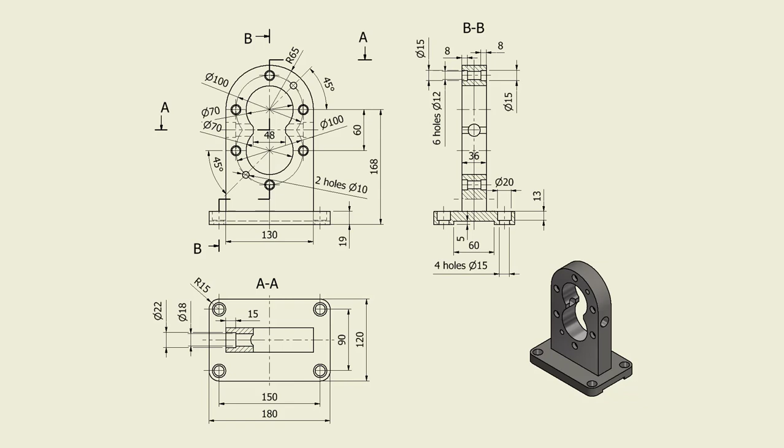Hi my friends, let's model the part number 24 bearing box from my collection of 100 parts.

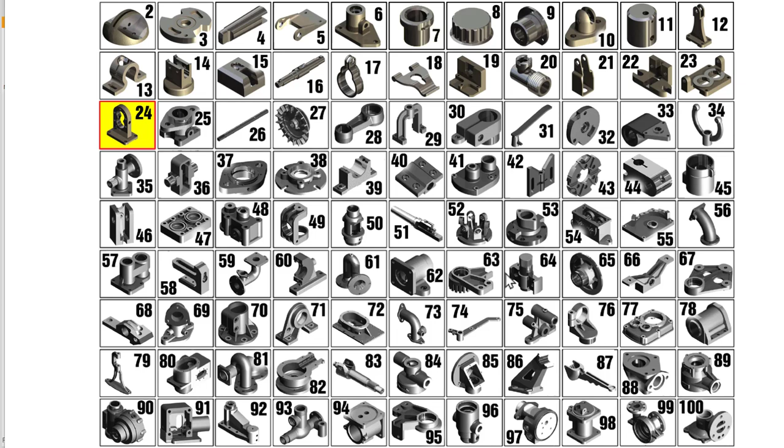Taking a look at the drawing, we see that we have here a part with a bottom plate and one vertical wall where probably some roller bearings in cassettes are installed, everyone, to have room here inside.

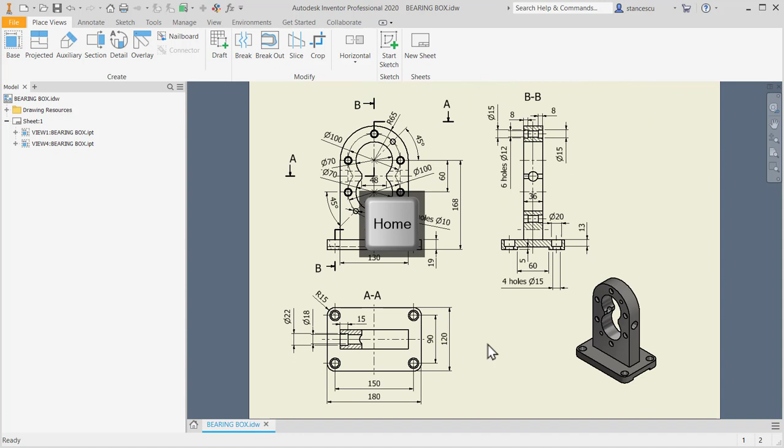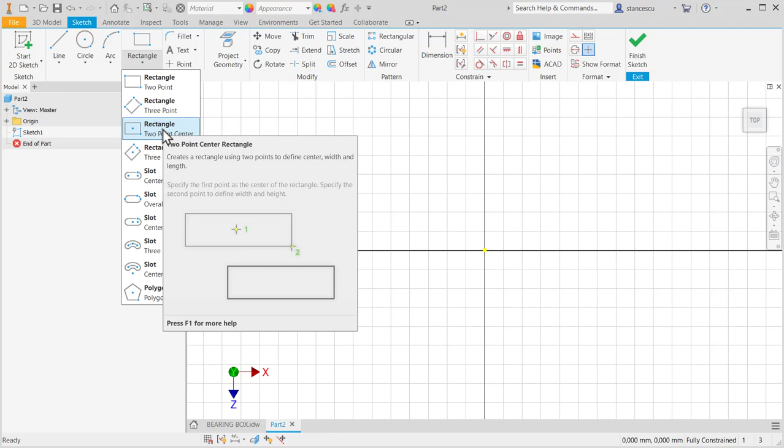We start by creating the bottom plate of 180 on 120 as usual, no problem. I can draw all this without speaking, but I like to tell you about this. I choose the centered rectangle, 180 tab on 120. Finish sketch, F6.

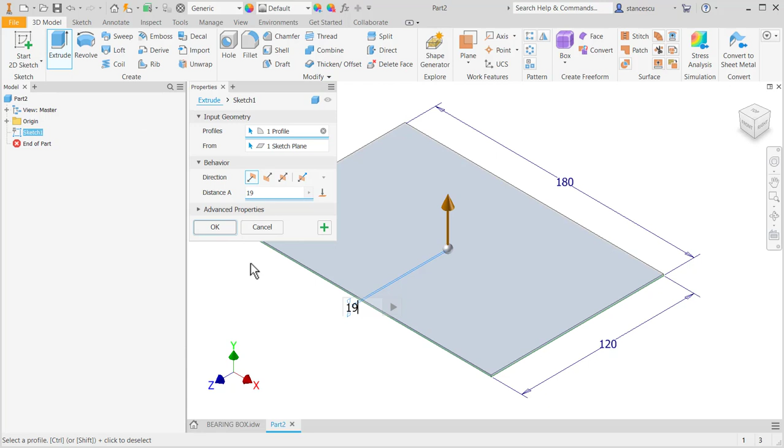The thickness is 19 and there are some fillets of radius 15. Extrude 19, select one edge, fillet of 15 on all the four corners.

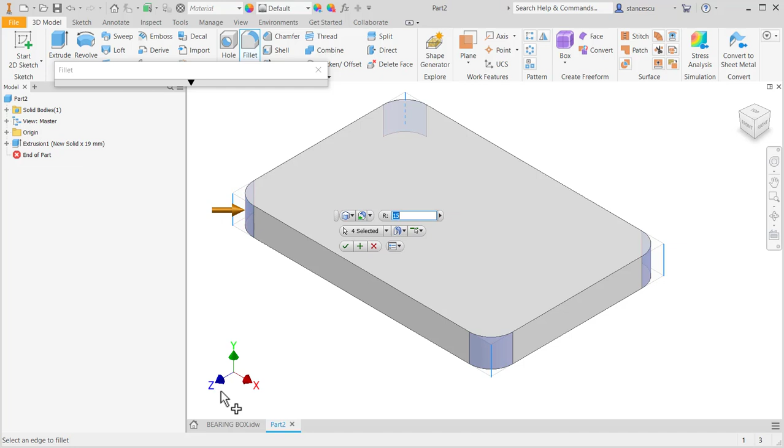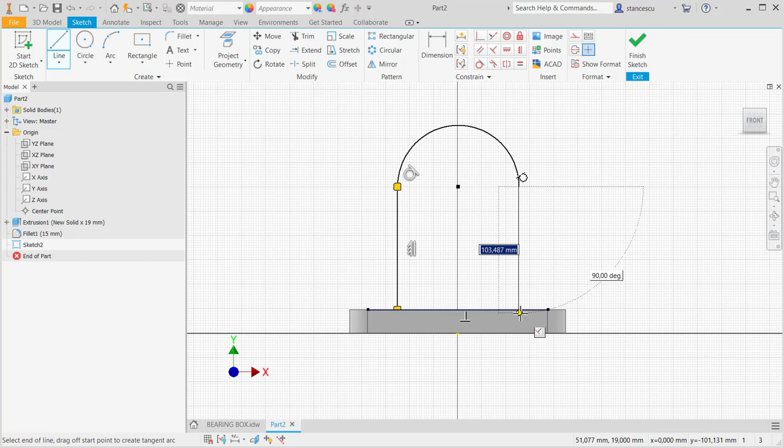Okay, now we use the plane XY to create a contour in our style. We have a style to create contour. Dimensions are 168 from bottom and radius 65 at the top.

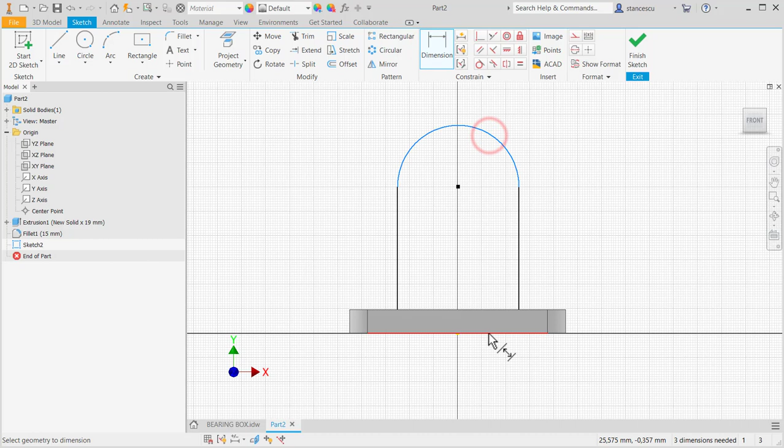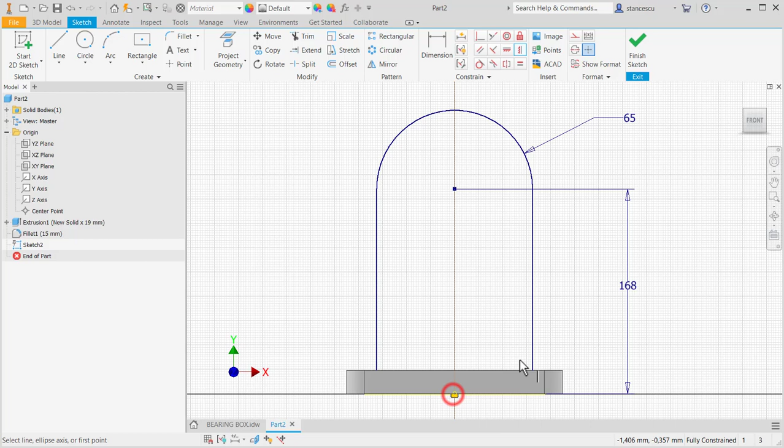Dimension from the bottom 168, and the radius of 65. And this is the final with fully constrained.

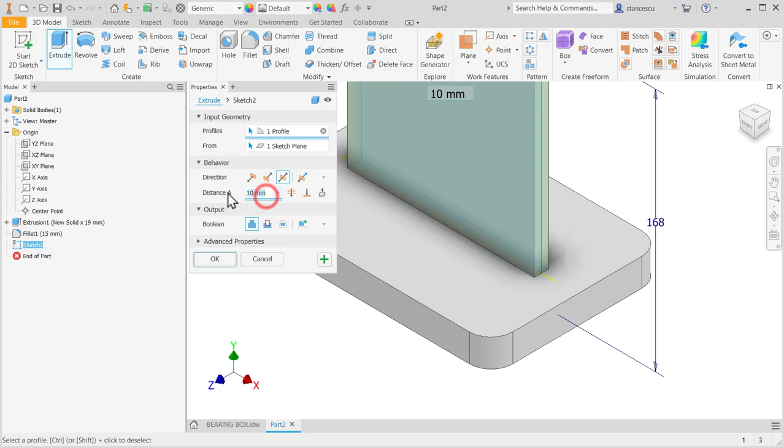Okay, now we have here 36 symmetrical extrusion, symmetrical 36. Double enter. Good. Now there are two circles and two lines of 48. The two circles, one is the center of this and the other is lower, in a lower position. The diameter are 70, the distance is 60 and the gap here is 48.

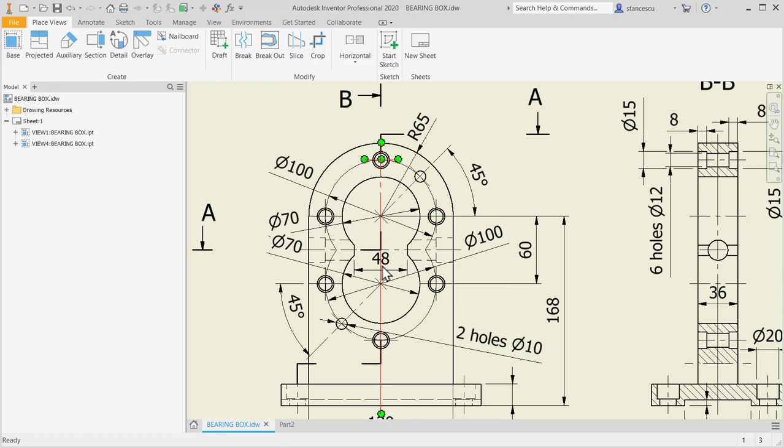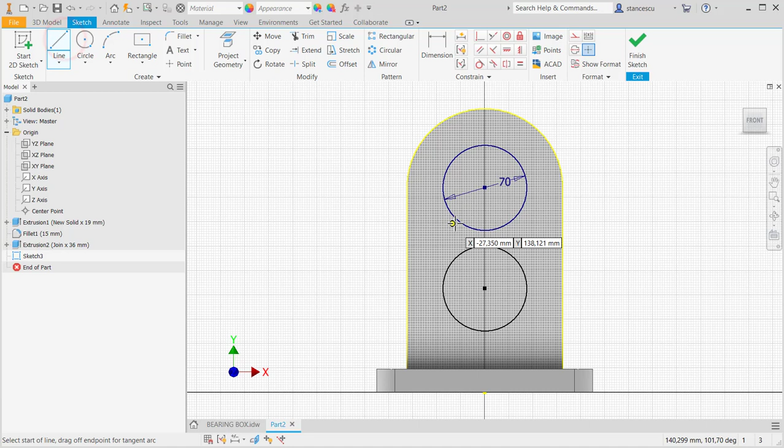On this face we draw a circle with diameter of 70, and another one with the same diameter, on the same vertical with their centers. We don't place the dimension to be so, because we want to draw these lines 1, 2. To be symmetrical, I make them equal, not axis, not other solutions.

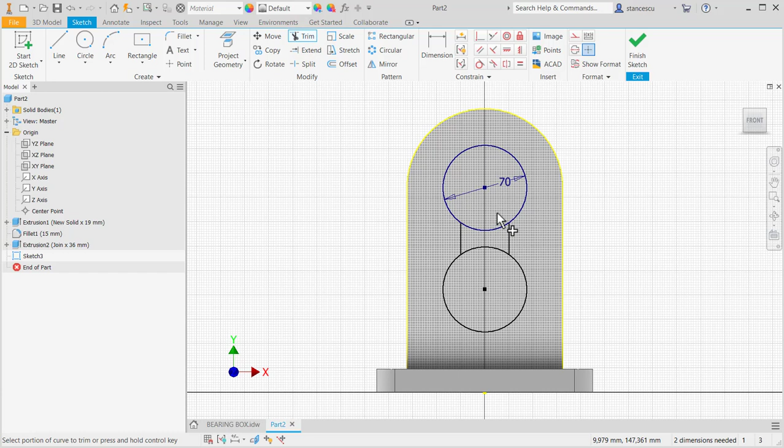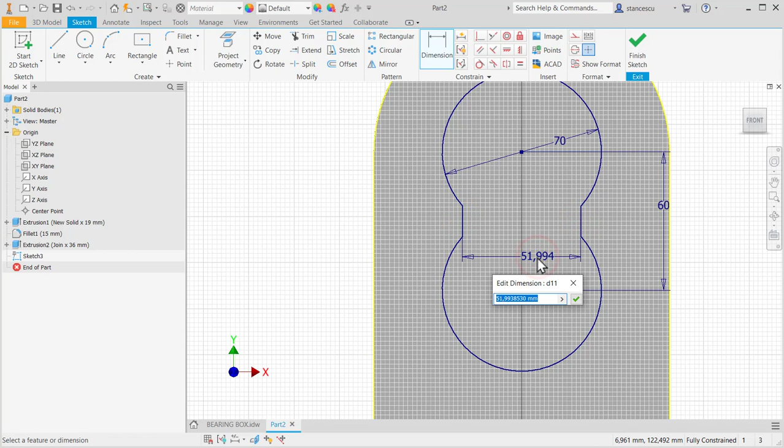And now trim, I press left button and go down. And now I place the distance between the circles of 60. Okay, and then the gap here of 48. Finish sketch, extrude, cut all the way through the part of this area. Good.

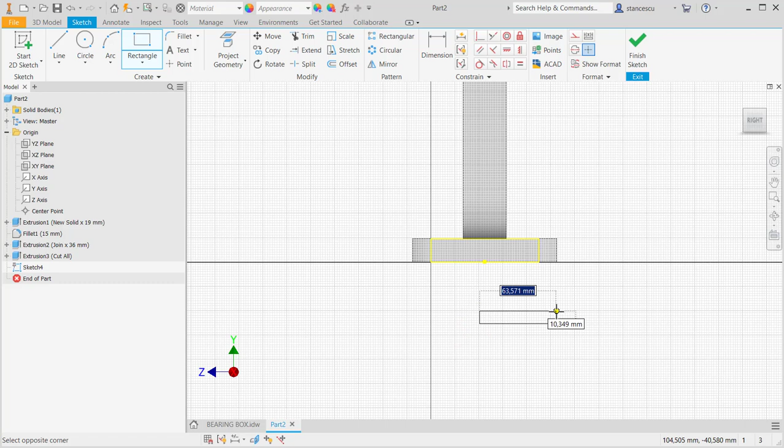We also have an important element, this channel of 60 to 5 on this face, a rectangle of 60 tab 5 with this point coincident with this point. Okay, finish sketch, extrude, cut all the way through the part.

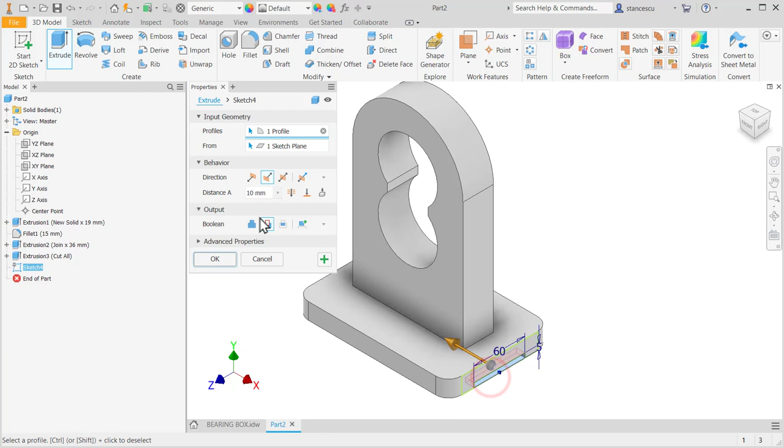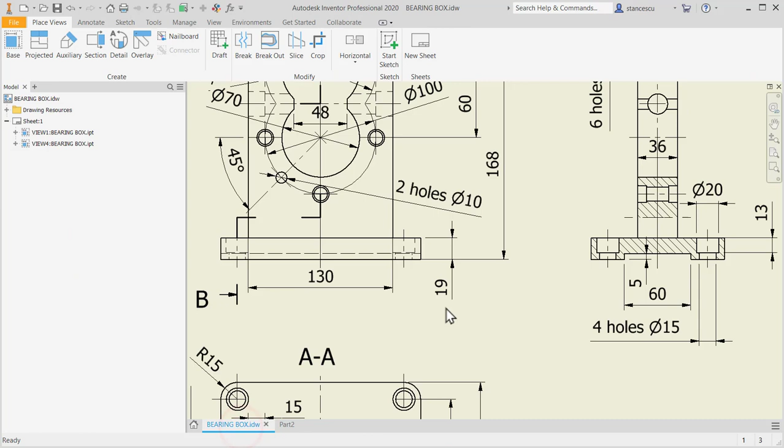Good. This is the situation. We go further by looking to the other features, and we see 1, 2, 3, 6 holes of this kind. The tool hole doesn't have a possibility to draw, to create both countersinks here. So we apply one and then another one on the other side.

Let's go with these holes. I'll place this one to apply then a circular pattern for 3, and then I apply mirror and duplicate these 3 on the bottom side. So one hole of diameter 15, 12, and the depth of the countersunk of 8.

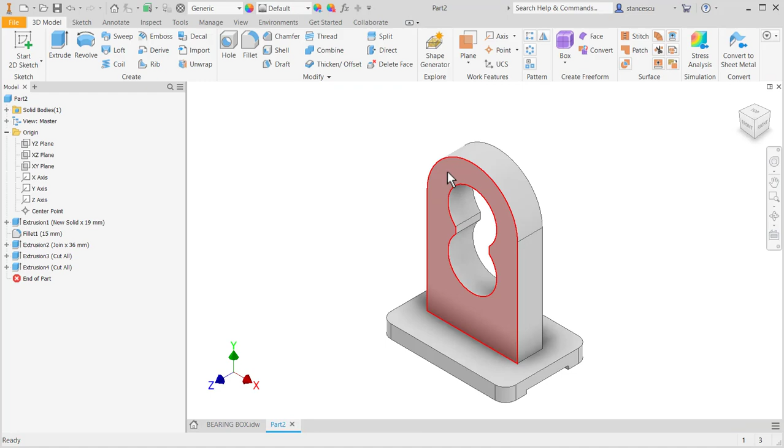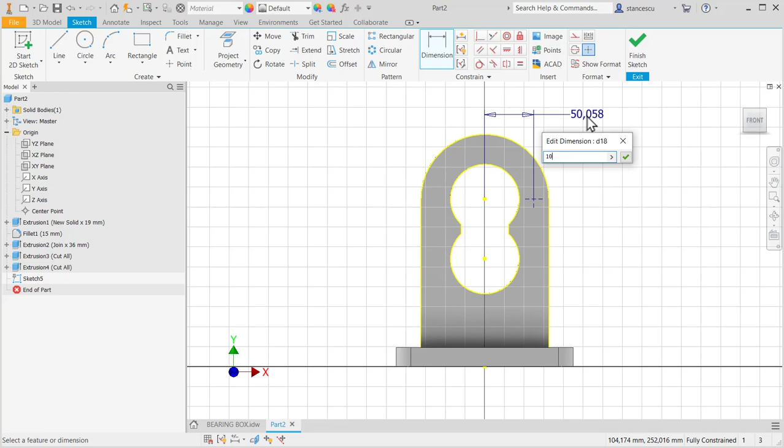We create a sketch with a point. The point is somewhere here on the same horizontal with this, at the distance of 100 divided by 2. You see here, 100 is this diameter, 100, centered here.

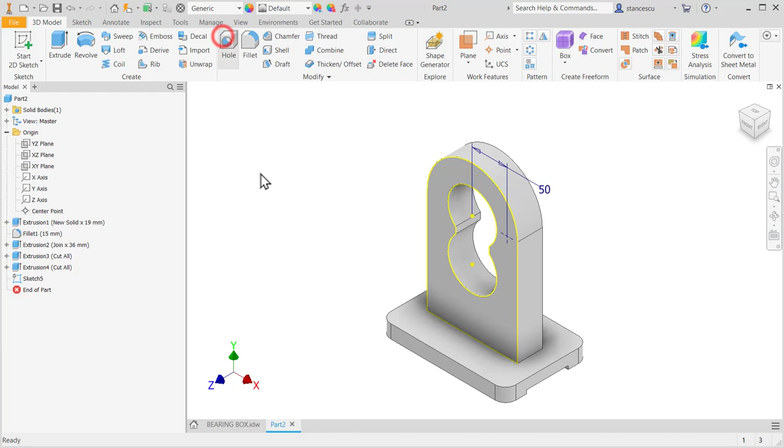Finish sketch, hole, 15, this is 12, 12, 15, 15, and the depth 8. The hole is through.

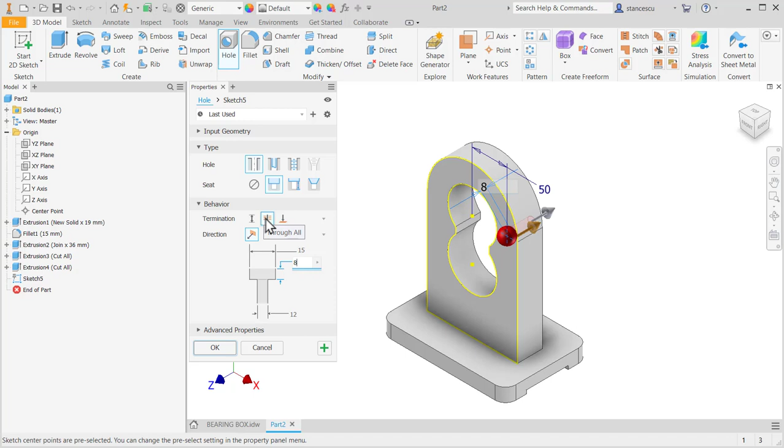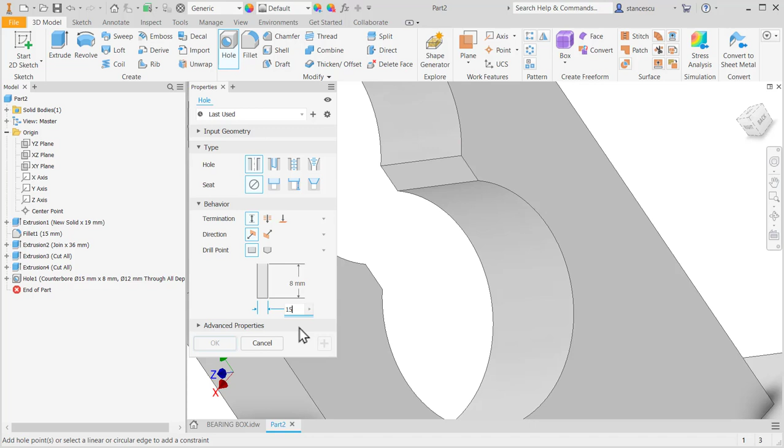This is flat and this is angle. Flat end of diameter of 15 and the depth of also 8 millimeters like the other. Where to place on this face, concentric with this. Okay, now we have the same counterbore on both sides of this part, as you can see. So this means that this hole is ready to be multiplied around this part.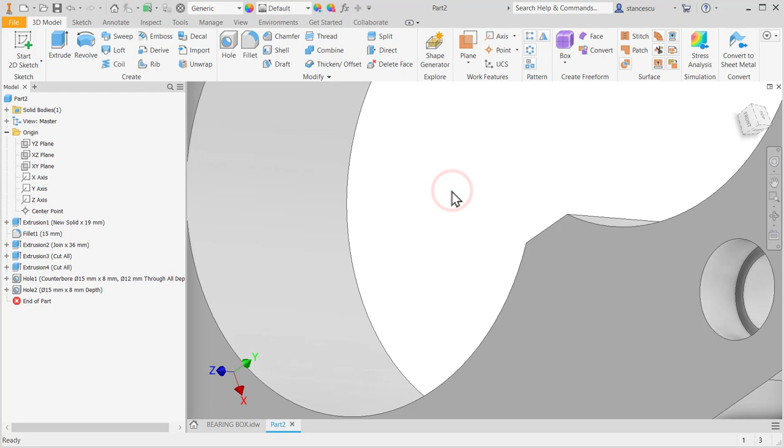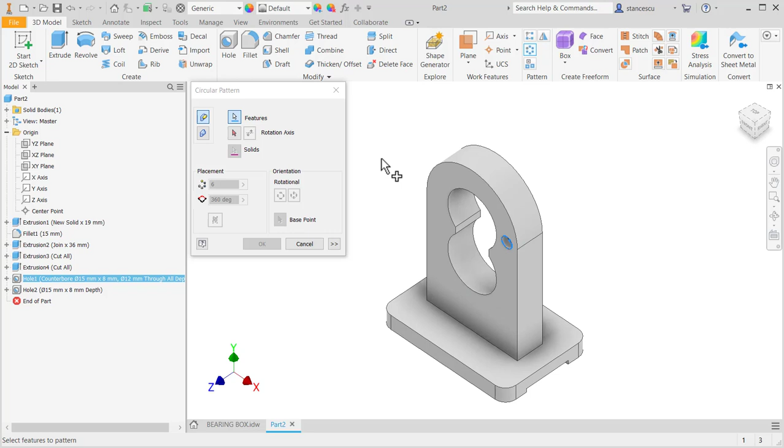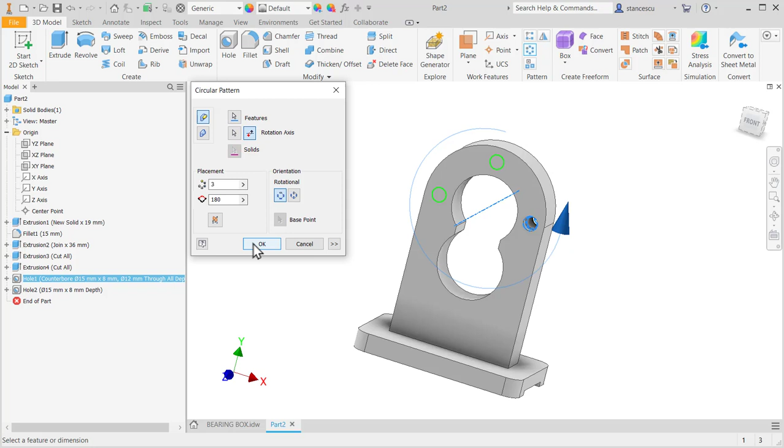We apply a circular pattern of these two features, the hole and the backside counterbore, and then we choose the axis, not 6 by 3 but 3, and not on 360 but 180. In the other, you see the direction, we change this and the others in the opposite direction. Good.

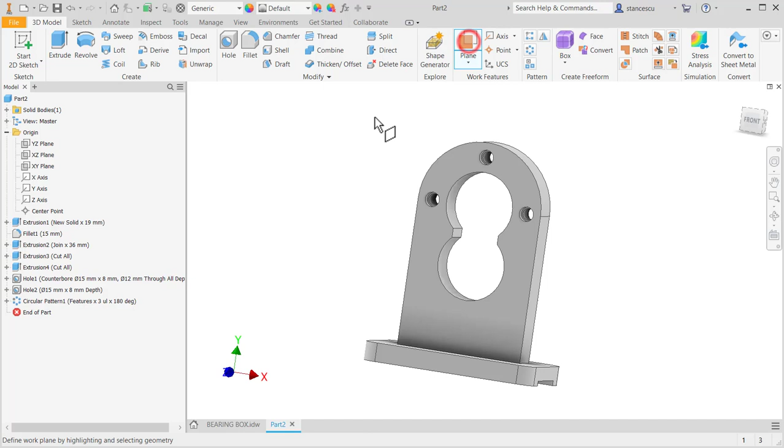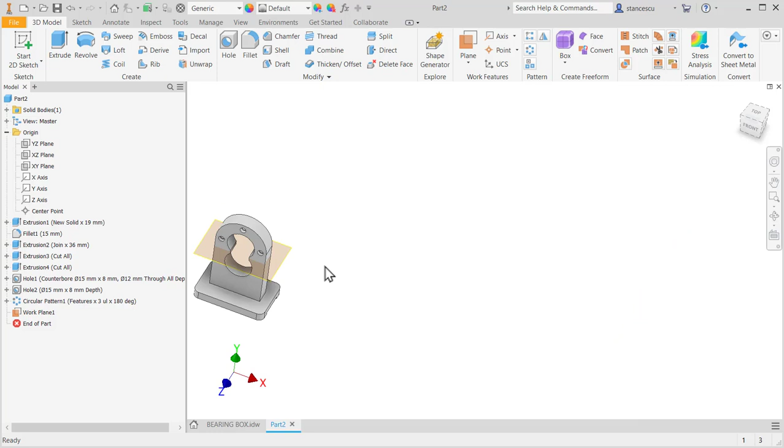Now I create a plane, a work plane, to mirror this on the lower part. Look here, plane, select, and now if I select a point, the plane will be on that point. The point is the middle. I can select a midpoint, the midpoint of this small edge. Yes. So there are many ways to create a work plane, but this is the simplest one: a plane parallel with this face through the midpoint of this edge.

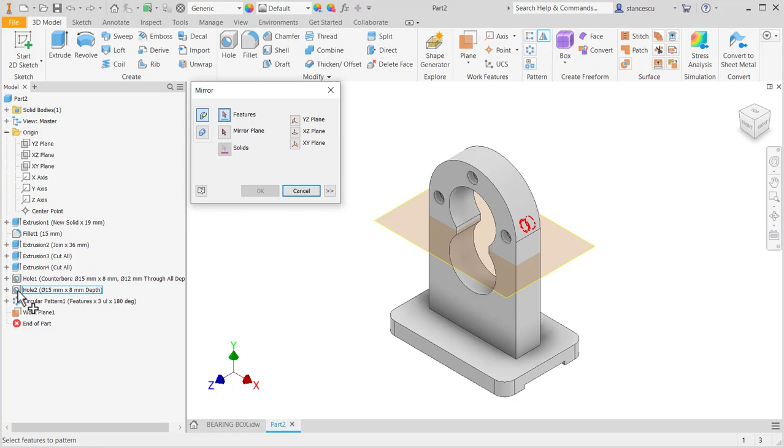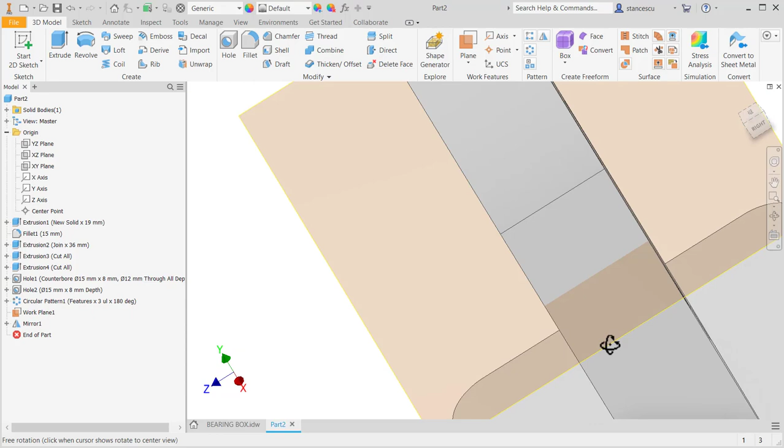Now we apply mirror of this and these features, all three, about this plane. Okay, we verify here and we see that everything is okay on both sides. This plane is not useful to be visible.

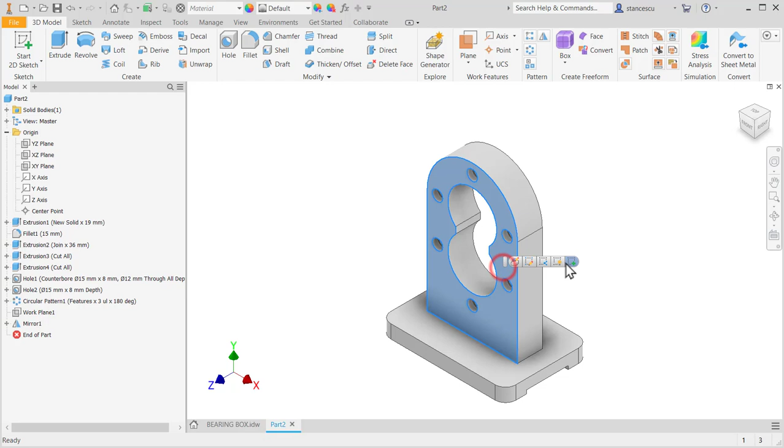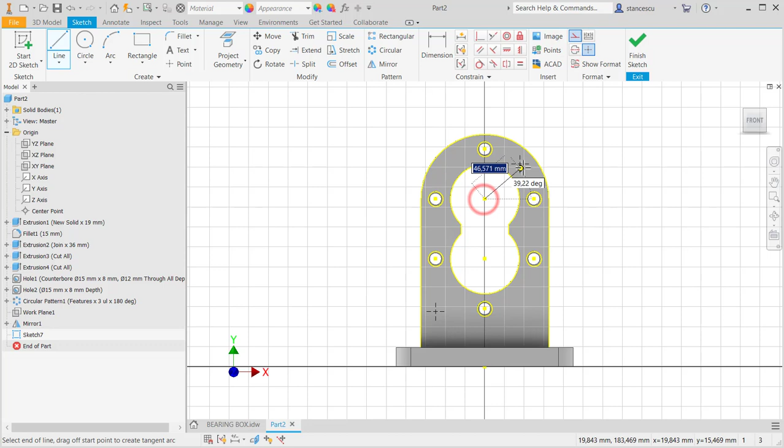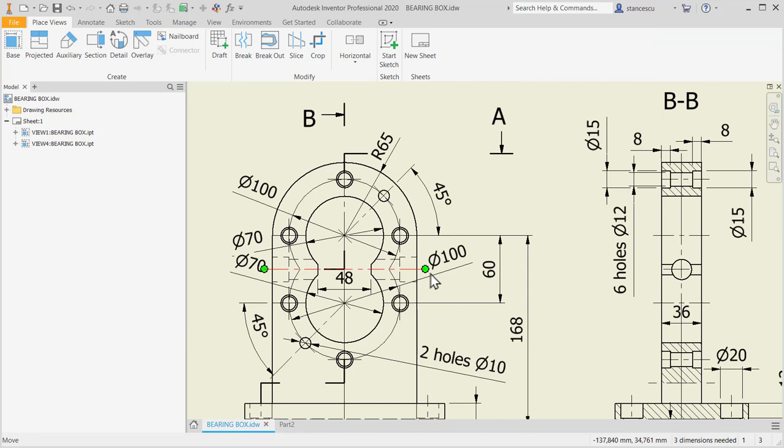Other two holes are this. 1, 2. Two holes of a diameter of 10 at 45 degrees. Very simple for us. We select this face, we place 2 points, 1, 2. We take advantage that both holes are identical. And then a constructive line, from the center to the point, and another one from the center to the point. These two lines are equal.

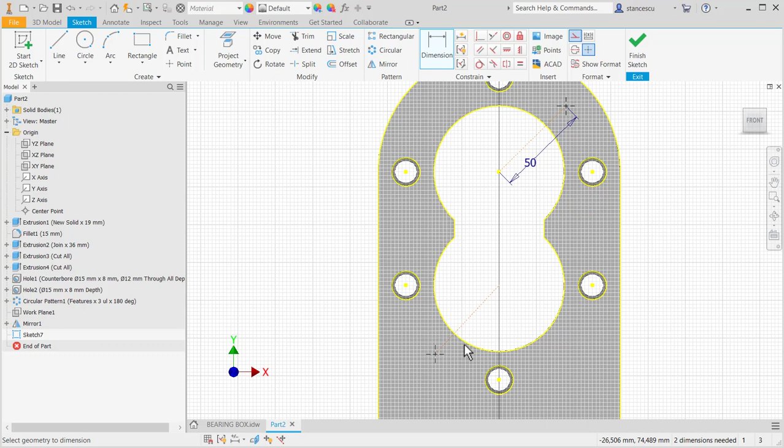The dimension is also 100 divided by 2 because it's the same circle. We place a dimension and we take advantage because of the equality, divided by 2, and the angle. We make them parallel, and one of them, this one, to be at 45 degrees about this face.

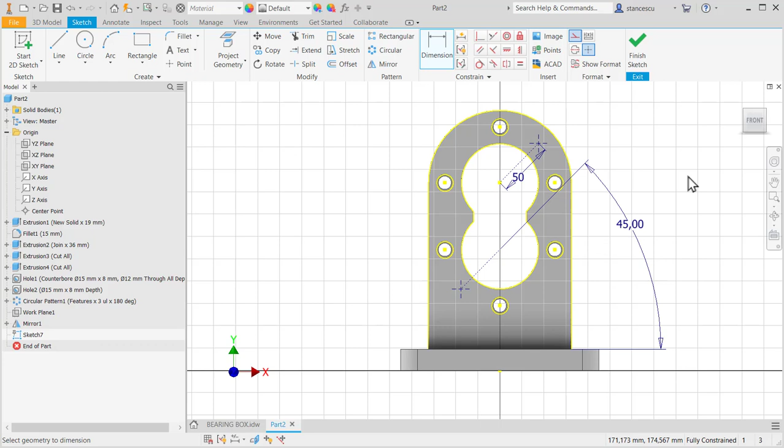Finish sketch, hole, cylindrical, through all of 10. Okay, very good.

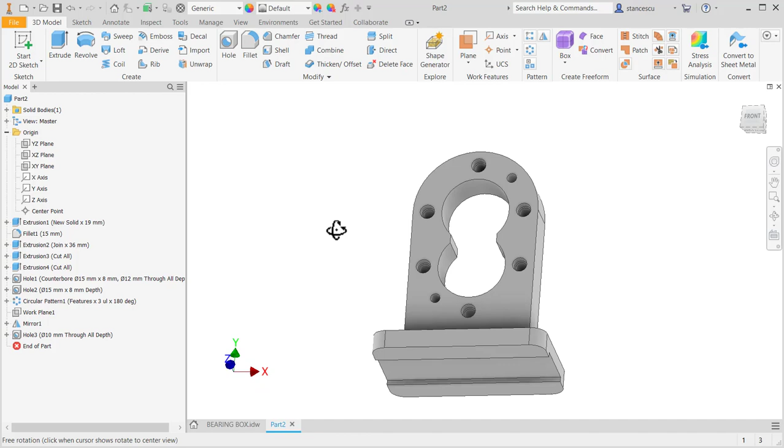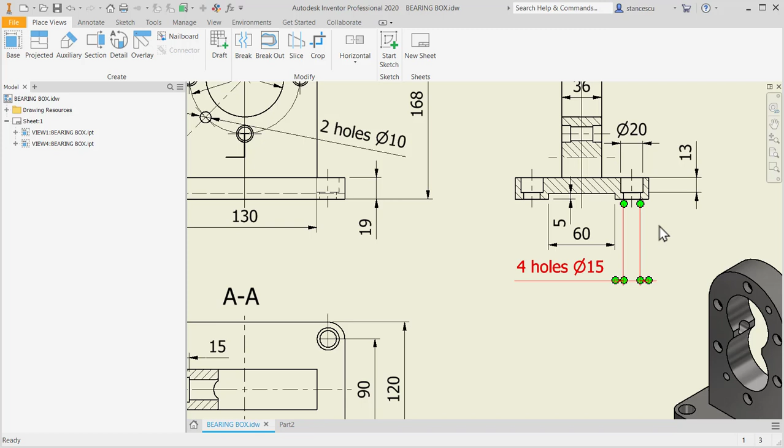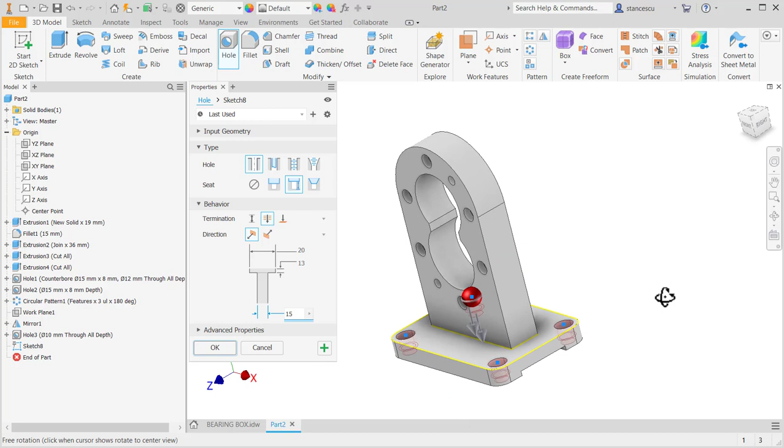What else? The holes in the bottom plate, which are placed in the center of the fillets, with dimensions 15 and 20 and 15 are diameters, and 13 is the depth. Counterbore, this is the face, this is the sketch. We close the sketch, and now we apply hole with diameter with the counterbore of 15, with 20, with a depth of 13. Where? Here, here, all the 4 points from the center of the fillets.

F6. This is the part, my friend.

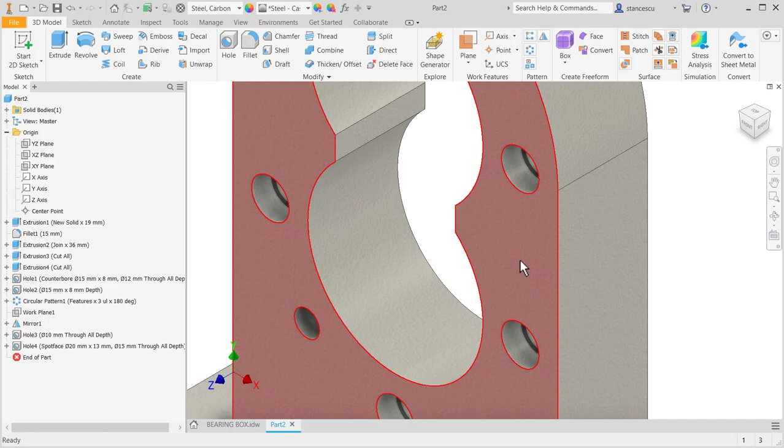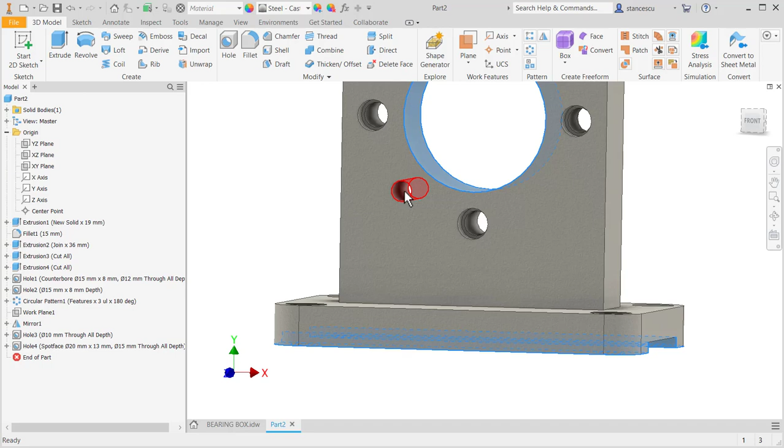We apply steel carbon, steel cast with granulation, and some faces to be steel polished. These are all the faces, I think. Oh, also these two holes, because they are precision holes. Steel polished. F6.

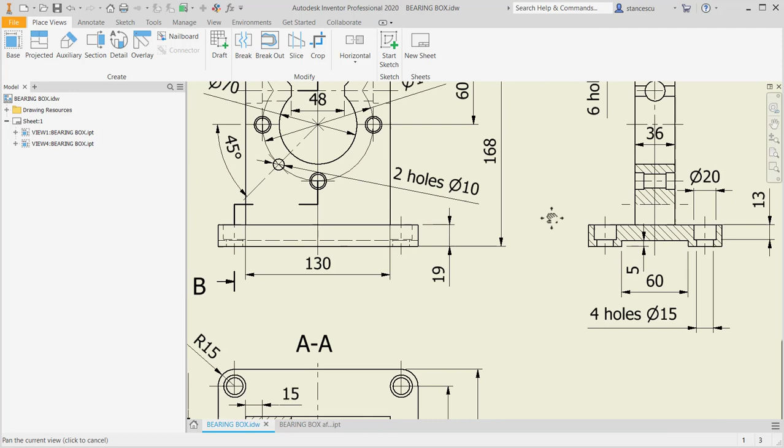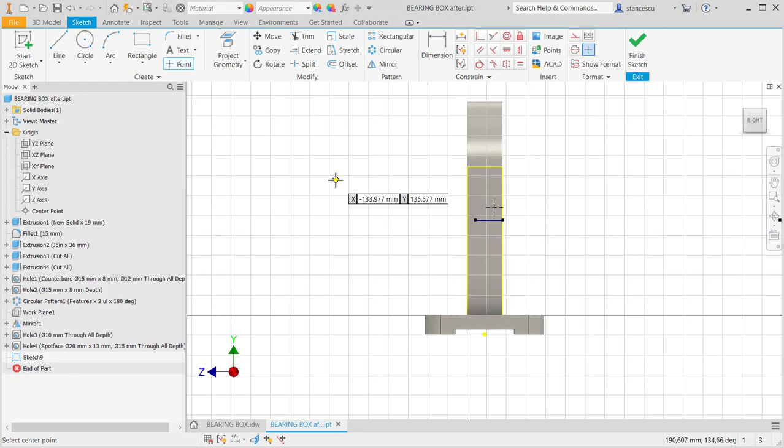The last thing to do are these two holes in the middle of the vertical wall. Dimensions are here: 22, 18, 15. You remember, yes? I start here. I place a point which must be in the middle of this facet. Yes, in the middle of this. This is why I project geometry, this line and this line on this face.

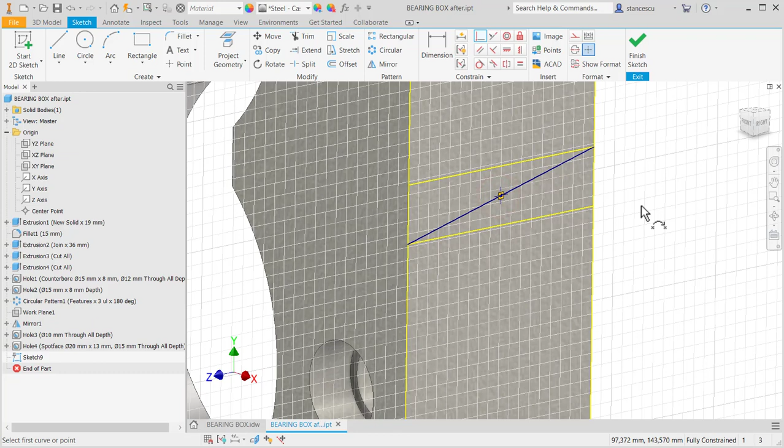I draw a diagonal line, and then I apply coincident to place the new point on the selectable midpoint of this diagonal. Finish sketch. Now, if you remember the dimensions, they are...

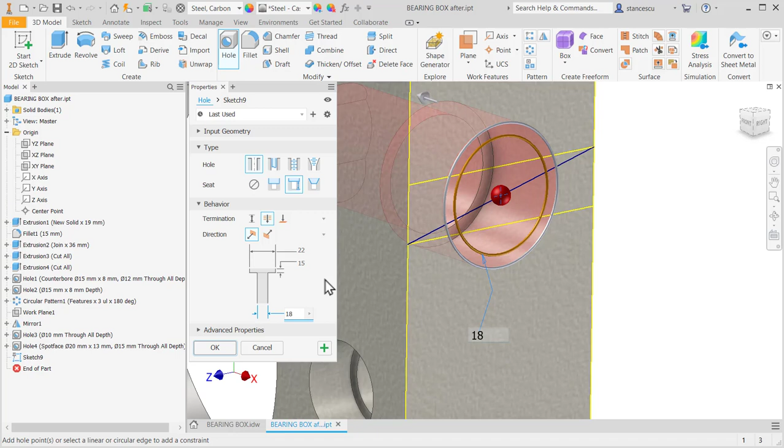22, 15, and 18, but not through. I don't want to go there, but to what? To this face. Okay?

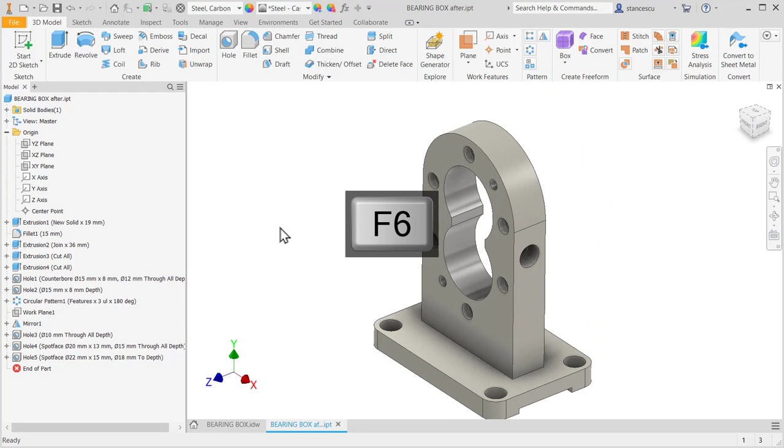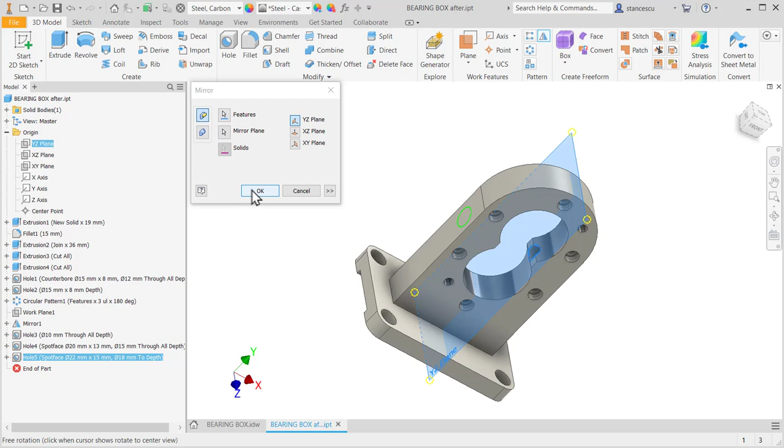Its data are here, 7 kilograms and something.